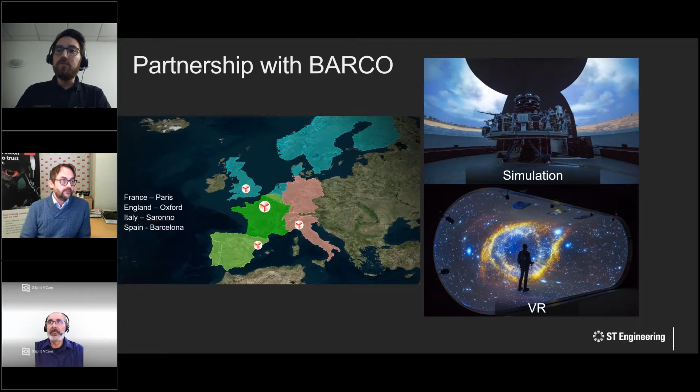So now we are jumping to the Tiger attack helicopter simulators. How is this simulator used? First of all, it's a simulator not for training, but more for behavioral studies, benchmarks of new and future systems, future capacities, and also doctrine for the different governments that use the Tiger. Today I cannot disclose who the customer is or where he is located, but we are going to talk mostly about how the simulator is used and in depth about its characteristics and how we work on this project.

The Tiger simulator is based around one sphere for the pilot, one sphere for the shooters, and then a control room to monitor the simulation and the tests being undertaken live. An important note is that the spheres are not used at the same time, but they share the same workstation for the image generators.

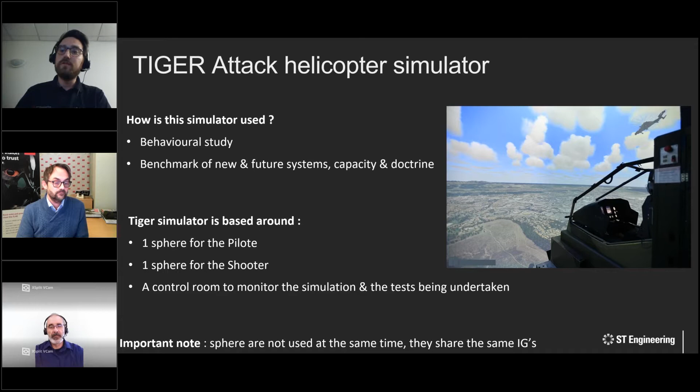The project itself started 2 years ago, with a simple goal from the customer: to upgrade the existing projection system. The basic goal he put on the table was to enhance the quality, the rendering, and the field of view. We will see these different characteristics later. The other thing was to ensure the performance and the preservation of the characteristics over time. He wants to use the simulator for more than 10 years.

Antycip worked only on the projection system, while Thales worked directly with the image generator, Thales View, to upgrade it to the latest version. The customer itself upgraded the critical component for him, which was the optic fiber—there is more than 100 meters of optic fiber between each IG and the simulator itself. He also upgraded the workstation and other sensitive components.

What we worked on for the display, the first thing is the projectors. The projectors in place were Barco Graphics 908. They had low lumens for what we know now, only going up to 1,250 lumens, and the resolution itself was only 2,000 by 1,750 pixels.

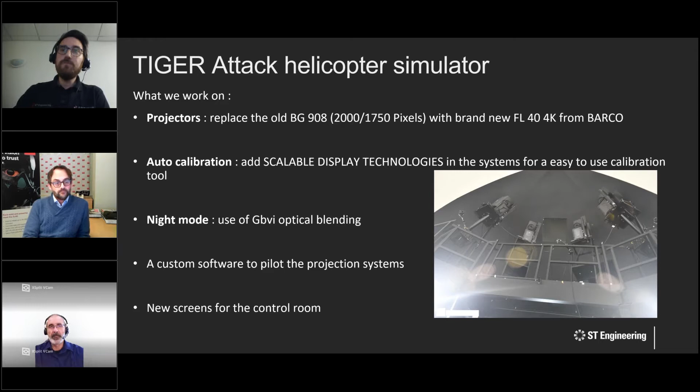Here you can see the field of view. That's why we upgraded the projectors in the first place. The zone in green for the pilot sphere, represented by an A, was the existing field of view. It was really small because of the BG 908, and the goal was to go up to the blue zone, up to 200 degrees in terms of FOV.

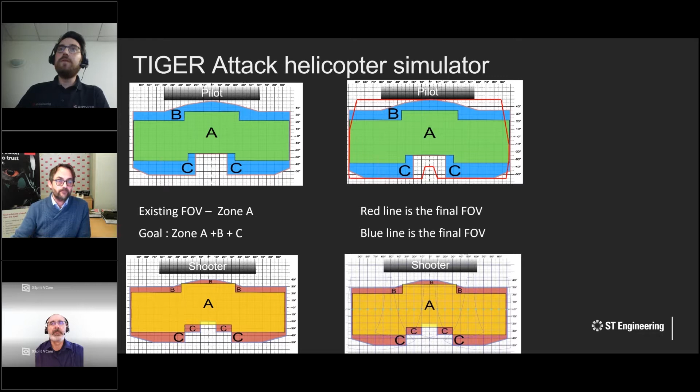For the shooter, you can see it was a bit smaller than the pilot sphere, and here you've got the result. We greatly increased the FOV, achieving 200 degrees horizontally. Vertically, you can see, for example, on the pilot upper level, the zone in red is what we are covering right now, and for the shooter it's the line in blue. So we greatly improved the FOV, which changed a lot of things for the pilot and the shooter.

Here you will see nice pictures from the customer, also from the upper level of his simulator. You can see the FOV, a nice field of view, and you can see the cockpit of his Tiger helicopter.

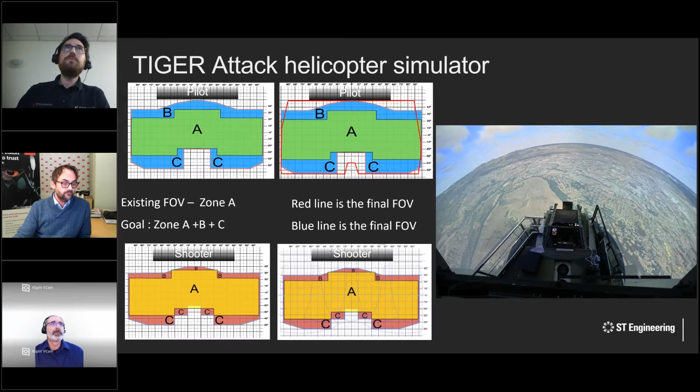Here is a quick picture, and that's what we produced at the end. The customer wanted to know exactly what the pilot's resolution was, so we produced for him a quick arc minute by pixel analysis to know exactly how many pixels there are and what the resolution is. You can see there is a huge difference because the projectors are placed at the top - there are smaller pixels at the top than at the bottom, which are represented in blue there.

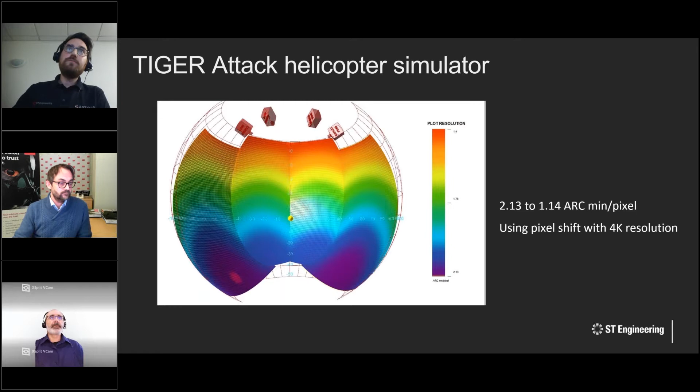You can note that it's only in 4K resolution. Here is the initial setup of the sphere. You can see that there is a lower level with the cabin itself, and the top level with all the display systems, composed of the main projectors.

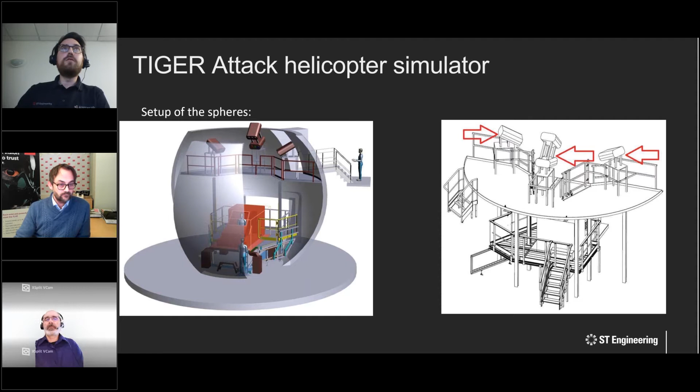The main challenge was that we get only one IG to control two non-identical spheres. What I mean by that is that the spheres were not built at the same time. There is a couple of years difference when they were built, which means they are not exactly physically the same. So the main point is at the upper level, as you can see on those two pictures.

The pilot and shooter spheres are not the same at the upper level, so we had to place the projectors at the exact same place, but we had to build really tailored supports for the projectors, and also create a removable access for the shooter sphere, which is really small in terms of the upper level.

It was really challenging because we did not have a lot of time. This is a controlled area, so we cannot, for example, build or bring scaffolds or similar equipment. We really had to build a removable access that has to be removed each time an intervention is done by our team. So it was really the main challenge.

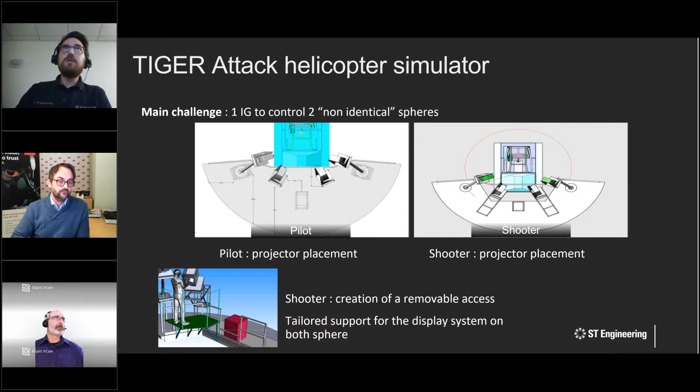For a perfect optical blending, you must blend a minimum of 15 to 20% of an image between each channel, and due to the position of the projectors at the top of the sphere, the field of view is way bigger at the bottom. In addition to the difficulty of positioning these projectors at the top in a constrained place, we also had to position the optical blenders at the exact same spot, since they are mathematically precise tools, and it would not have worked otherwise.

We also used a professional topographer to map each sphere and obtain the exact pattern needed for the auto calibration. This required an intervention of about 2 days of work for this person to map exactly the sphere and how they are built.

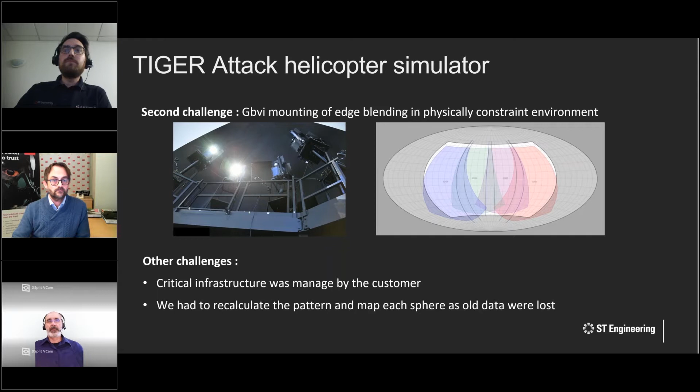And after that, a quick recap of this project. At the moment, the customer is happy. We have trained him and he's fully capable of using the simulator. It's important to note that the goals are met in terms of resolution, brightness, and field of view. The total cost of ownership is reduced. We only had one intervention in 2 years on site, which is already really low. Also, the display system is built to last at least 10 years after installation, so it is going to be up until at least 2028.

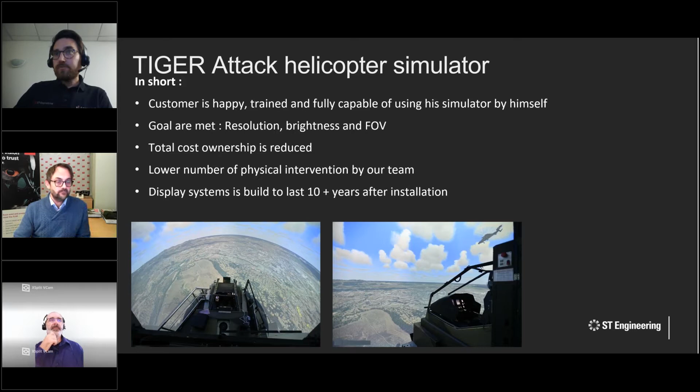Hello, I'm Stéphane Ameriot, and I work at Airbus Helicopters, France, Marignane. We are situated near the Marignane airport. So, a presentation of the system first.

The Sphere is our main development simulator, what we use at Airbus Helicopters. You have to understand that a development simulator is not a training simulator, so we are not trying here to train pilots. We have pilots who are already well suited and know how to pilot a helicopter. We use this kind of simulator to develop new flight instruments, algorithms, or even completely new structures.

Apart from that, the system is an 8-meter diameter sphere, so quite a large sphere. We have a 190 degree horizontal field of view, which spans the complete horizontal field of view for the pilot, and an 85 degree vertical field of view. The majority of this field of view is located beneath the helicopter, because this is where the pilot most of the time is looking.

They are looking down. And as you can see in the picture, this sphere can fit a variety of different canopies. Each canopy can fit by sliding in and out of the cockpit, and the adaptive structure of this environment allows us to test different canopies and different combinations of equipment, to see how we can work on and enhance this. So apparently I had a problem showing the picture — this is a picture of the sphere, with the canopy sliding in and out of it.

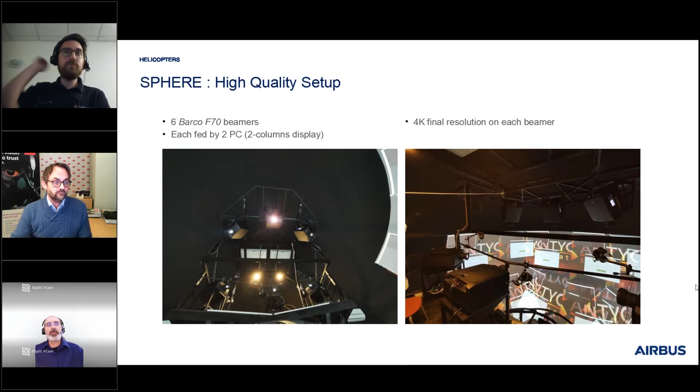For the calibration of the system, we also put our trust in Scalable Display Technologies. We've worked a long time with them, and they provide a very easy to set up solution, with the end result being a seamless display with warping and blending without any visible artifacts. The F70 also allows us to have very high contrast and luminosity, which lets us very precisely control where we want this luminosity on the end display.

Also with Scalable Display, we have multiple simultaneous calibrations in the end. This allows us to have multiple available positions for the pilot and co-pilot, each having their own warping and blending. So during the runtime of the simulation, depending if we want the pilot or the co-pilot maneuvering the helicopter, we can switch the calibration at runtime, and each of them will have the correct warping of the display without showing any parallax artifacts.

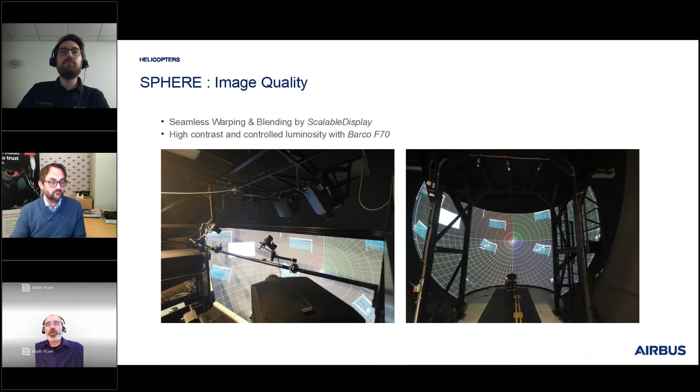In the end, we have a display that is as realistic as we can possibly have to date. As you can see on the two different images here, we can show details down to a small gravel or a blade of grass if needed, without having any seam visible to the pilot, and with homogeneous luminosity. This is partly also due to the fact that the F70 has an anti-smearing capability.

So during very rapid turns, which are quite often done with a helicopter, there is no longer a blurry mess visible on screen. The image can stay sharp, and thanks to the 4K resolution, we almost obtain a 3 arc-minute resolution, which is quite high for this kind of system.

And we have a total field of view with a distance of view of around 100 kilometers in the end. This allows us to see even near flatland, very high distance mountains, and so the pilot can really feel like they are at home and understand the geography exactly as they would in a real helicopter.

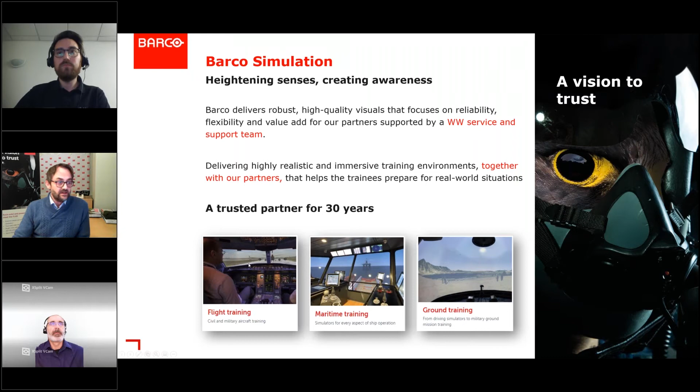So what really drives the defense and training simulation market? It's of course a sum of a lot of things, but one thing I think we can all agree upon is that the ultimate goal is to offer products and solutions that improve better and more efficient training, at lower costs.

So let's look at a little historical perspective. We saw from the Tiger sim that there was some old Barco optics, the good old CRTs. So I would say for the last 10, 15 years, there's been a clear shift in technology from customized to COTS, and from analog to digital.

Going from high frequent maintenance and a lot of customized components to what we have today, which we call components off the shelf, has been hugely aided by rapid development in the commercial and residential markets, especially on the display side, with better image quality and higher resolution.

Also more processing power, and the tremendous impact the gaming industry had on the IG side in rendering and creating more realistic images. The transformation from analog to digital has also significantly driven performance with increased processing power, and equally important, simplified communication between the different components in a simulator.

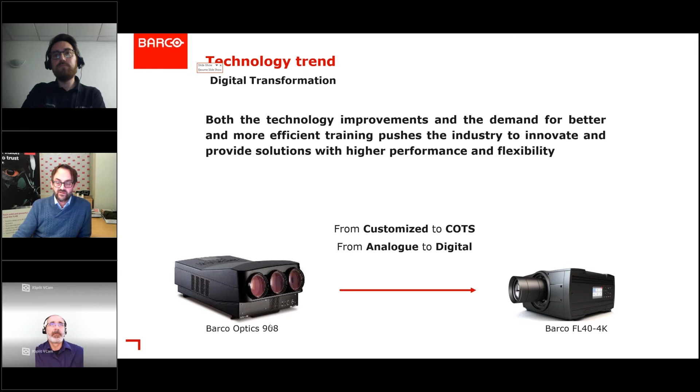So what does this do to overall market trends? Budget is typically the number one limiting factor in the defense sector, both for new training devices and upgrades of existing ones. Real-life training is often very expensive, and quite a few tasks are almost impossible, or very dangerous, to do in real life.

As a result of rapid improvements in technology and the performance increase this enables in simulators, it opens up several new possibilities and opportunities. Increased simulator performance means that both the quantity and the quality of training increases.

More training, but also more complicated training tasks, can be shifted from live training to training in the simulator, which saves a lot of cost for the defense sector.

Adding more training and more complex training tasks also means that simulators are used more hours in the day. This, combined with multi-purpose simulators, for instance support for several types of cockpits in one and the same dome, also puts more stress on the components and the reliability of the simulators and the systems as a whole.

With fully booked training schedules, there's not much room for downtime and maintenance.

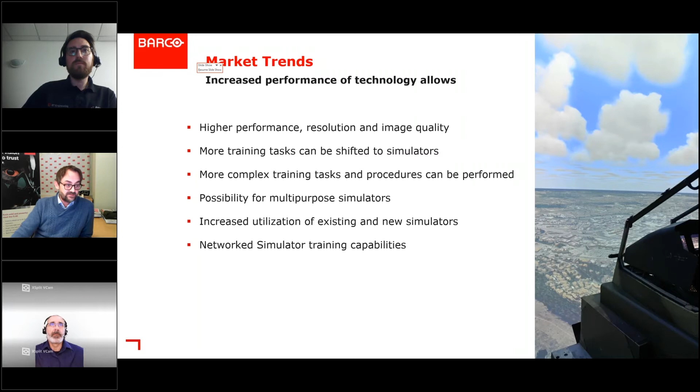So how do we address the market challenges? Within the simulation division, we spend a lot of time together with partners to make sure we know what the market needs, from high level market trends down to the nitty-gritty product features.

As a visual components supplier to the system integrators that operate in the defense market, it's imperative that we have a product offering that addresses what the market needs both today and tomorrow.

It's of course important to have the right features to meet the requirements, but our core design parameters when we develop new products are based on the high level market trends discussed previously.

Based on the strategical market requirements, our key product drivers are even better performance and more resolution, long lifetime reliability, and linear performance over time to support the increased demand for high uptime requirements.

Knowing that budget and cost is also a primary driver and a potential limiting factor, we also have a high focus on developing products that secure a low total cost of ownership. When choosing components and during our product development, these parameters always make up the core design values.

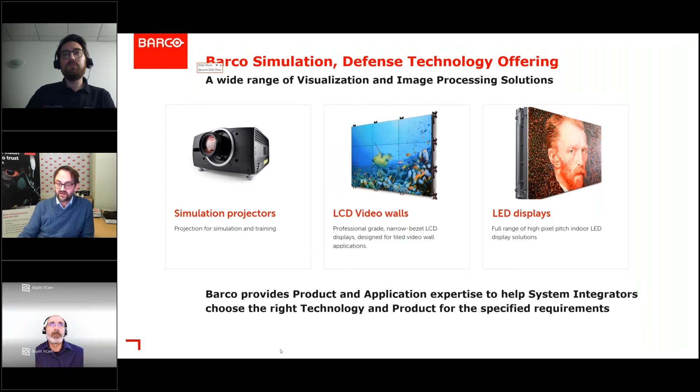As mentioned, projection is still the dominant visual display technology, and we offer an extensive range of projection product platforms. For the training and simulation market, this is the well-known F-series products.

Over the years, we've had quite a few different products and different technologies in our training and simulation portfolio, but currently the majority is based on single chip DLP technology, primarily due to lifetime and performance over time benefits.

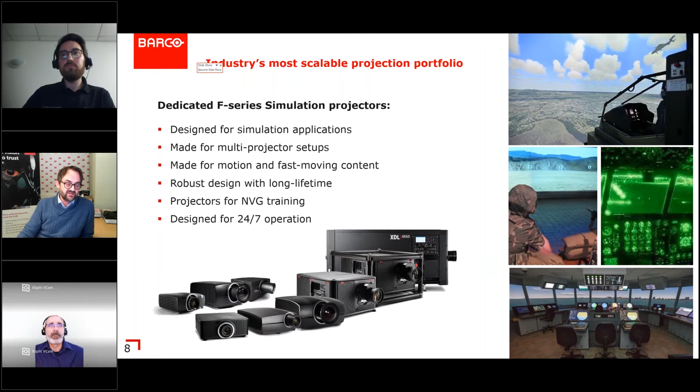The F-series are specifically designed for the simulation market to ensure we meet the product requirements, including motion platforms, high resolution, night vision support, fast frame rates, and other key performance features.

So with all that in mind, I want to spend the last few minutes to introduce our latest product for the training simulation market, which is the FL40 Mark II series. This was the same product chosen by Antycip for the Tiger upgrade simulator. The Mark II version is the same form, fit, function as its previous version, but offers 25% more brightness.

So in short, what is the FL40? It's a true solid state product with long lifetime. It has a solid state light source, an RGB LED light source, no moving components, to ensure reliability, high uptime, marginal maintenance, and low total cost of ownership. This product addresses all the key requirements we initially talked about.

So I'm not going to go into a full product presentation with specs and details, but I'll highlight some of the product features and design choices. The key concept design of the FL40 is around the solid state light source, with dedicated red, green, and blue LEDs.

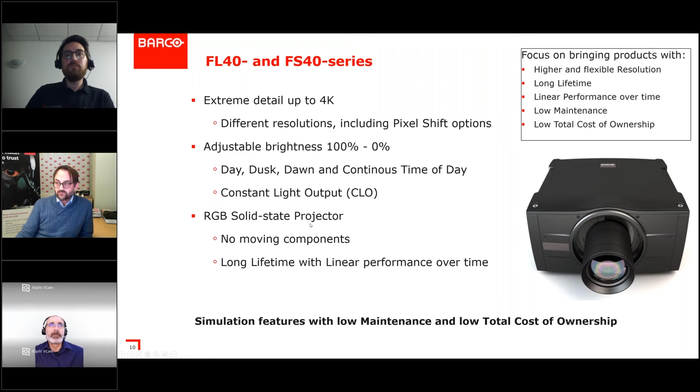A dominant scenario where the defense industry is the key driver is for training at night to support the requirements of train as you fight, fight as you train, and also to be able to use the real equipment and ensure you avoid negative training.

We also have the FS40 series. FS stands for full spectrum. The FS40 versions are also physically the same as the FL40 models, with the same features and performance, but they offer a dedicated and independently adjustable IR light source, typically used for simulators where stimulation of night vision goggles is required. To accommodate budget flexibility and training requirements, we support both dual and single input IR plus RGB.

To further increase the performance of the FS series at night, we have our FLDX lenses, which are optimized for contrast performance in NVG scenes. These lenses offer more than 3 times the contrast over the standard FLD lenses. This allows you to perform training using the real equipment, and as mentioned, to ensure negative training avoidance — bring your own device and the correct equipment.

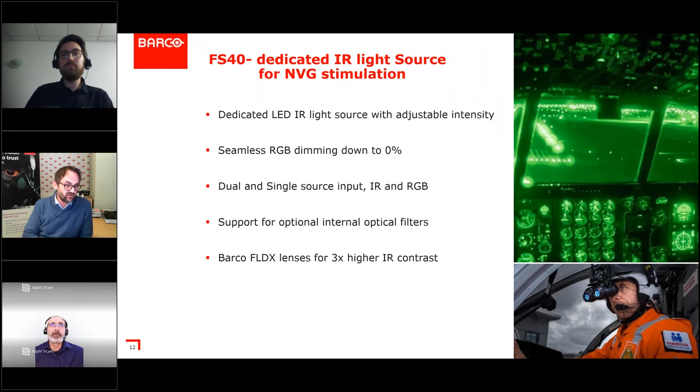There's a lot more to these products. We're not going to go into a full detailed description, but check out our website, or feel free to contact us for more details on these products.

I'm just going to round it up with some highlights and why our customers choose the FL40 products. Over the last couple of years, there's been increased demand to save on operational expenses, which requires long lifetime, low maintenance, and low total cost of ownership. With the FL40 series, we've done our best to offer a true solid state product that fulfills all the market requirements as good as possible.

Also, the FL40 capabilities match the high resolution and contrast levels of competing technologies with its optical scalability at a lower cost.

Last, but equally important, is our global support services and the partnership that Barco Simulation offers to our customers, granting access and interaction to the product and engineering teams within the Barco Simulation group.

So to that said, the FL40 series is our latest contribution to offer better and more efficient training at lower cost, which is in the end what we all strive to do to bring this market forward.

It's about the night vision goggle capabilities on the Tiger simulator. It was not a requirement for this customer, unfortunately. He wanted to do night scenes in simulation, but it didn't need NVGs. He just wanted to use his Tiger simulator at night, but not with NVGs. So we didn't have to use the FS40. That's why we only chose the FL40.

Another question is, do we get any customers in India? Yes, of course, we've got customers there. We've got some projects in defense and other areas, but we cannot talk, unfortunately, specifically about that. But we can contact you afterward in order to talk about that.

A quick question also about the FL40 against the FS40 MK2, sorry. The main difference is the NVGs, as Sandré talked about during his presentation. There is a night vision goggle capability for the FS, which is not integrated in the FL40.